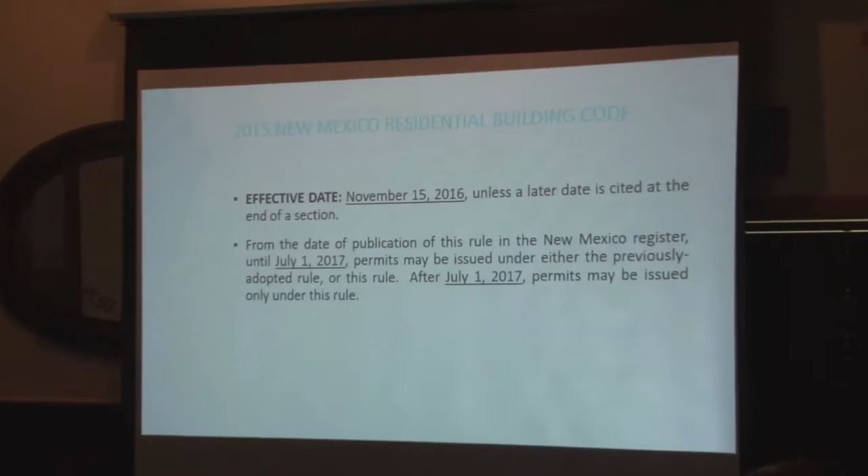So this is the effective date that we just talked about. So the actual adoption of the code took place on November 15, 2016. This is when the code was actually published. But what we did this go around in the body of the codes is we put some verbiage on the bottom which granted a 6-month grace period. So they put the effective date of July 1st, 2017. So once again, that date is in effect. So everybody's required to be in the 2015 building code.

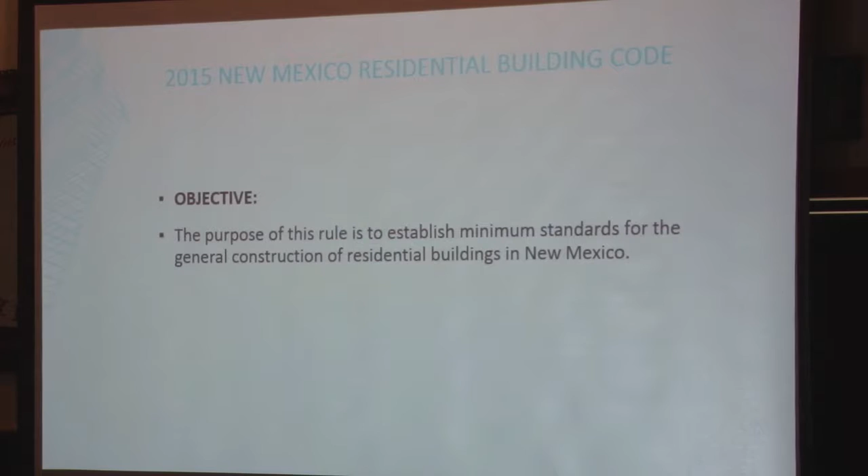So what's the objective here? The purpose of the rule is to establish minimum standards for the general construction of residential buildings in New Mexico. Adoption of the 2015 International Residential Code. This rule adopts by reference the 2015 International Residential Code as amended by this rule.

Oftentimes, contractors, even architects, they think, well, the state adopted the International Residential Code. What we do is we adopt the International Residential Code by reference with the New Mexico Administrative Code. So the New Mexico Administrative Code is always the first code, and then the code that you have adopted is the second code. So you always want to reference the New Mexico Administrative Code to see what those significant changes are, if any.

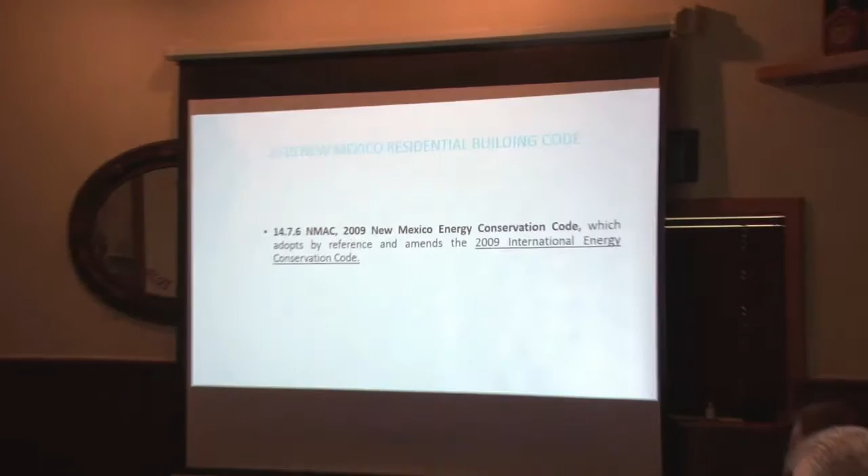One of the major things that we didn't change this go around is the Energy Conservation Code. We chose to stay in the 2009. At the end of the day, it's all about dollars and cents. What is that added cost to go from the 9 to the 15? And I could tell you some of those costs were significant. And again, it all comes down to dollars and cents. So we chose to stay with the 2009. So any references in the 15 that referenced the 2015 Energy Code, you got to refer back to the 2009 because that's the code that we're under.

We're going to get into Chapter 3, Building and Planning. So again, this is where some of the significant changes are, changes that we made. And once we're done with this presentation, I'd be more than happy to share it with Joyce so you don't have to take any notes, and she could email it to everybody. That way they can reference what those significant changes are.

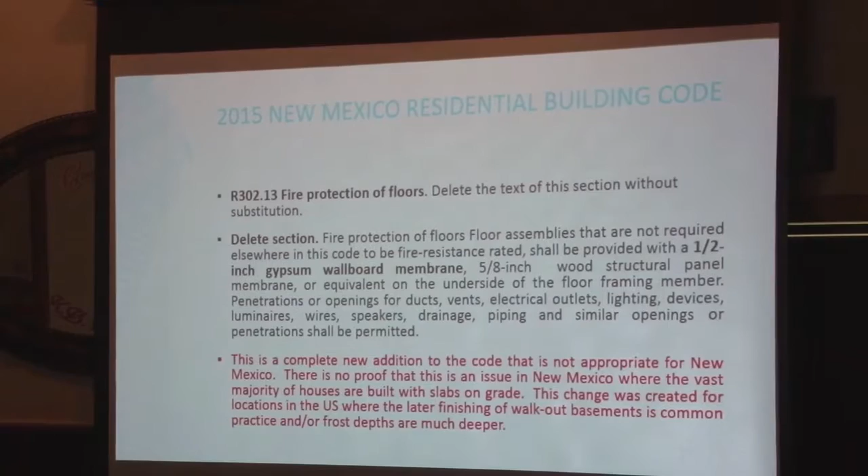One of the other changes that we made is under fire protection of floors. This is something that they placed in the body of the code where the underside of floors would have to be protected with 1/2-inch gypboard or 5/8. So what we did is we amended this out of the code and it's no longer required.

And the reason for that, this is a completely new addition to the code that is not appropriate for New Mexico. There's no proof that this is an issue in New Mexico where the vast majority of houses are built with slabs on grade. This change was created in locations in the U.S. where later finishing of walkout basements is a common practice, or frost depths are much deeper. So once again, we didn't think it was necessary, and that's a lot of added costs if you do have a subfloor. So we took it out of the code. It's been amended.

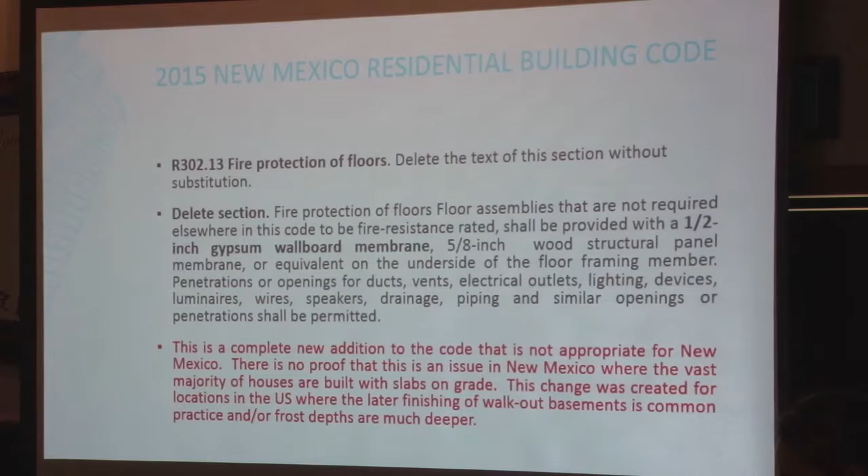This is dwelling and garage fire separation. The reason why I have this in here is this topic always comes in every code cycle, from the 3 to the 6 to the 9. It was even in the 12 to 15, where the separation between the house and the garage in the IRC, it could be half-inch gypboard. What we've done is we've amended that, and we require that it be 5/8 gypboard between the house and the garage. So that is in the NMAC. It is in there. All the information is in there verbatim, the way I have it right here.

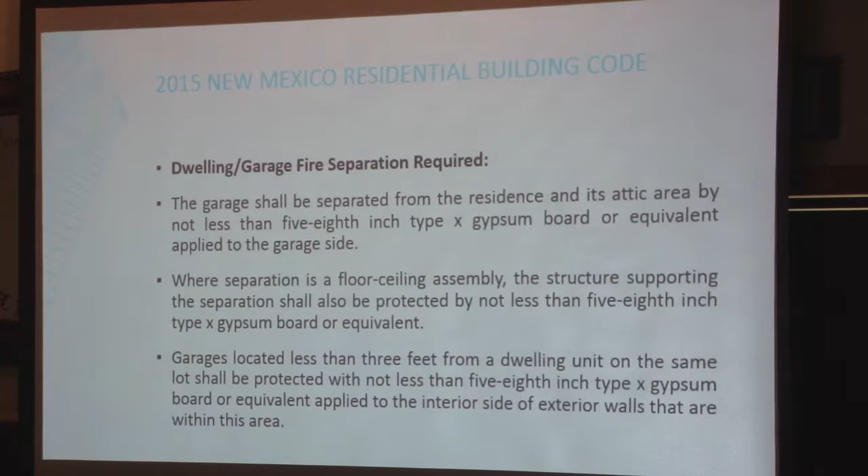Another question that comes up: are you still required to have the spring-loaded hinges between the house and the garage? The answer is yes. You could have the spring-loaded hinges, or you can have an actuated hinge that sits at the top of the door, so long as that door is self-closing.

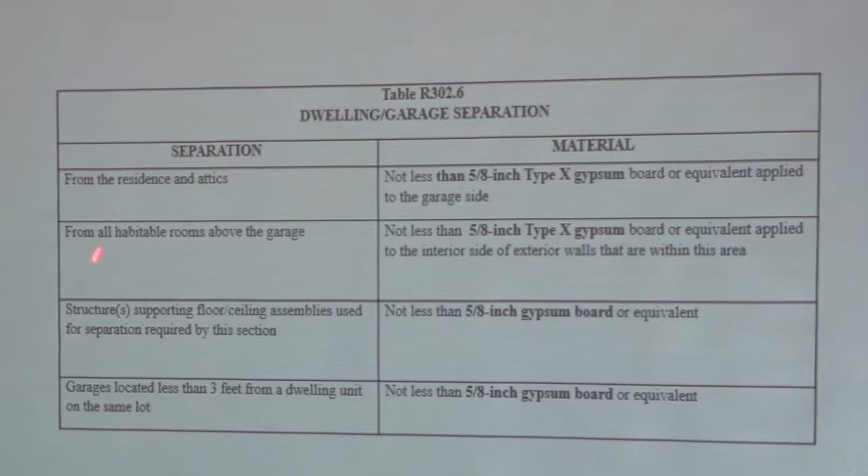If you go to the New Mexico Building Code, this is a table that's referenced in there on what the separation requirements are. If you notice, from the residence to the attic, from the habitable rooms above the garage, everything's called out all the way to the bottom, and it's all 5/8 gypboard. That's what would be required. So it is in the body of the code now. If you build a garage, this is what the garage has to look like when it's done.

So, all right. So, I'm just joking. Yeah.

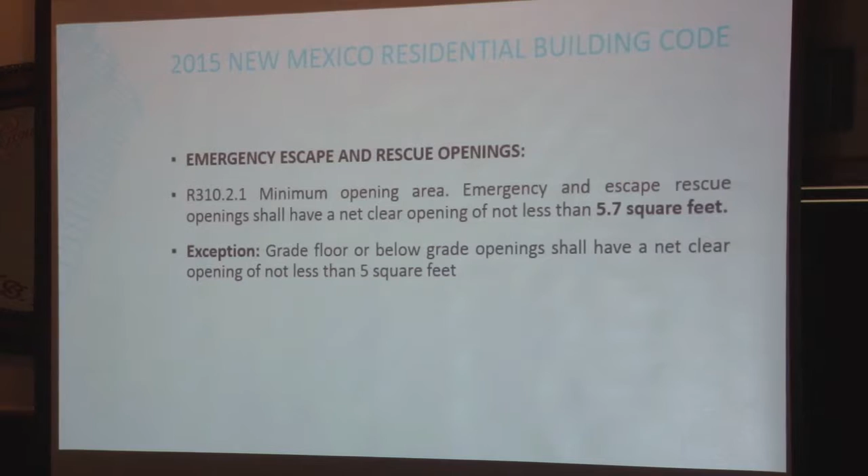So emergency escape and rescue openings. Again, this is just kind of a refresher. 310.2.1 minimum openable areas. Of course, everybody knows the requirement is 5.7. How many of you know that there's an exception in the code? There is an exception in the code where you could reduce that square footage down to 5.0. However, the sill height has to be on the outside a minimum of 44 inches. So there's an exception where you could reduce that egress. And again, that's only on a one-story structure.

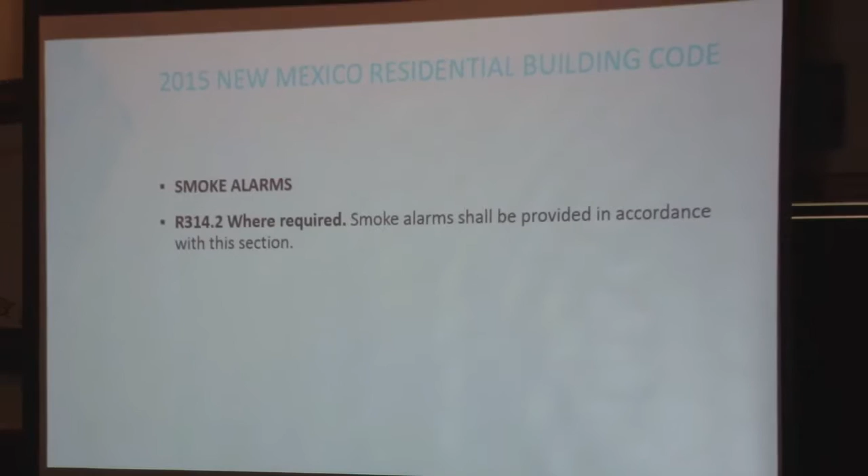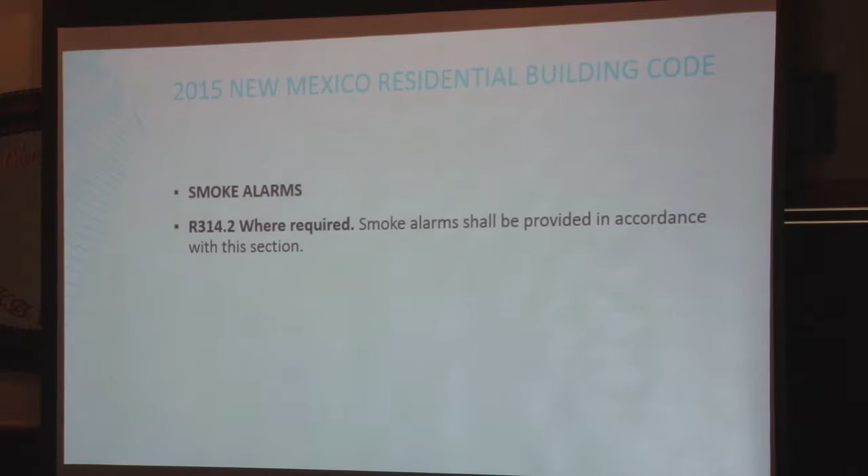Smoke alarms. This is another, again, just refresher. This hasn't gone away. Smoke alarms are required. But what we're going to talk about here is the placement of smoke alarms. Oftentimes I go to houses after the fact and I see smoke alarms that are tucked right on the corner of the ceiling and the wall. That's not acceptable. Smoke alarms don't operate that way. So let me show you some examples.

So you see, there's an example here, you have a smoke alarm. It has to be a minimum of 4 inches away from the corner of the ceiling and the wall. Once again, they say smoke doesn't get into corners. So that's the reason why you want to have it away from the wall and or the ceiling. And if you look at the manufacturer specifications on some of these smoke alarms, some of them require that you be a minimum of 6 inches. It just depends on what product you're using, but for sure you have to be at least a minimum of 4 inches away from there.

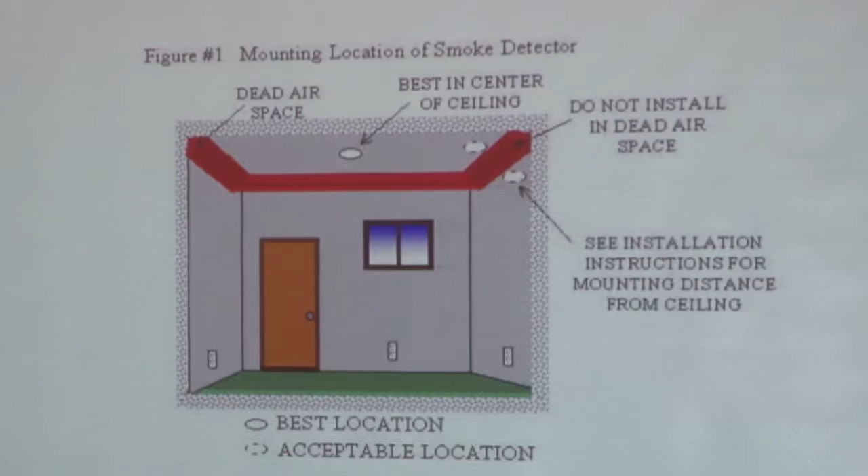Here's another example of the 4 inches. If you got a pitched roof, same thing would apply. From the peak of that roof, you want to be at least 4 inches down before you place any of those smoke alarms. On this type of roof as well also.

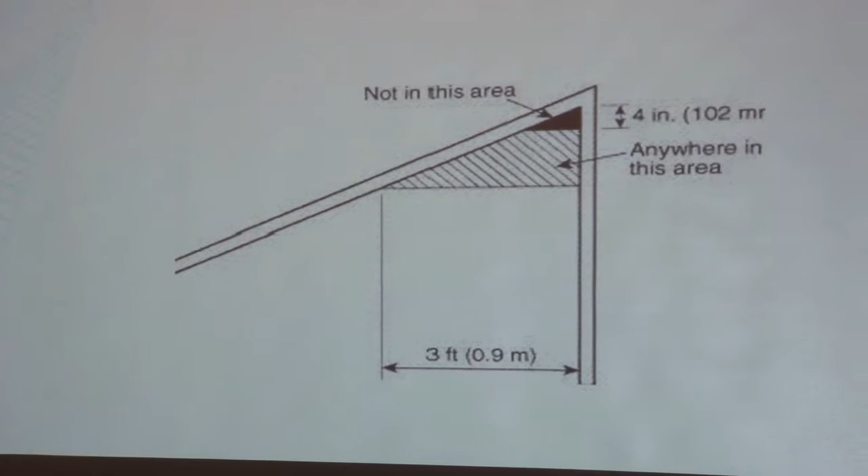So now we're going to get into carbon monoxide. Carbon monoxide detectors were introduced into the code in the 2009. They are required. Anytime you have a gas fired appliance, you have to put these carbon monoxide detectors. There are some carbon monoxide combination smoke detectors that are acceptable and you can use. So if you come across a situation where you have to do a combination, that is legal and you can do it.

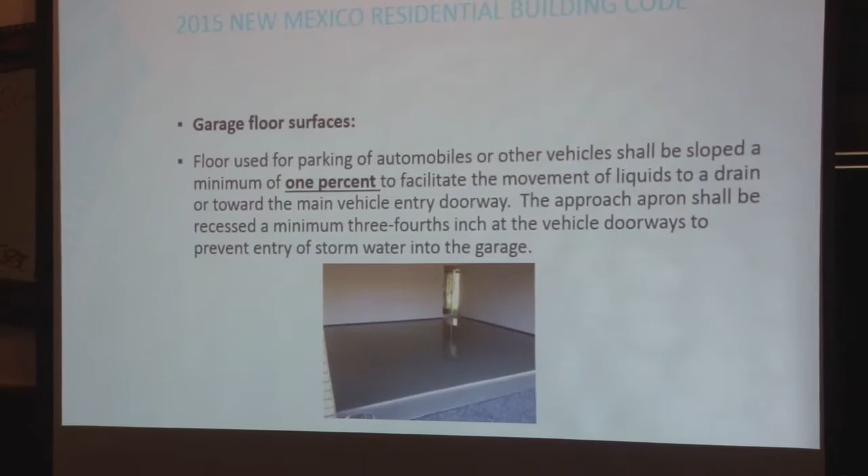On this section of the code right here, I like to call this the Ron Hibner, my chief inspector. I think it was a good change that we made in the body of the code. Before, it said a slope is required, but it didn't tell you what that slope requirement is. So what we did is we've amended that section of the code, and in the body of the code, we've indicated what that minimum requirement would be, and that is 1% slope on any garages that you have to have for water to get out of there.

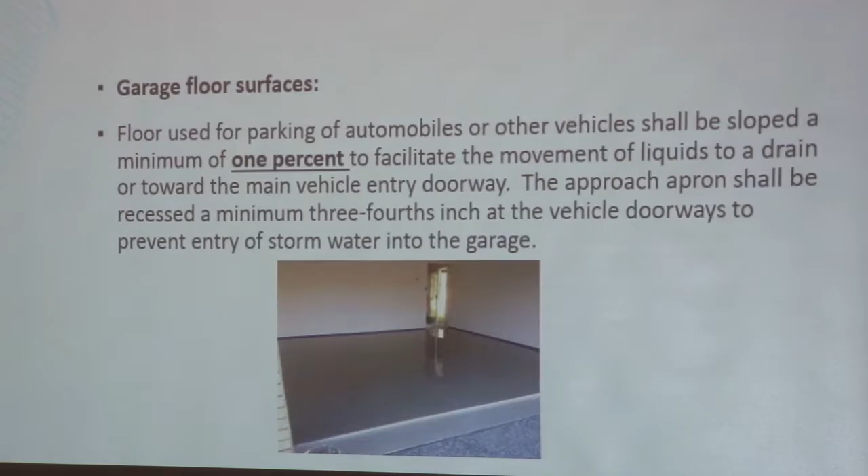This one is stair treads and risers. This is one of the ones that the State Home Builders Association was instrumental in putting back into the body of the code. This was removed under the 2006 code adoption, and they didn't like it. So what they did is they submitted some amendments, and we were able to bring it back into the body of the code of the 2015.

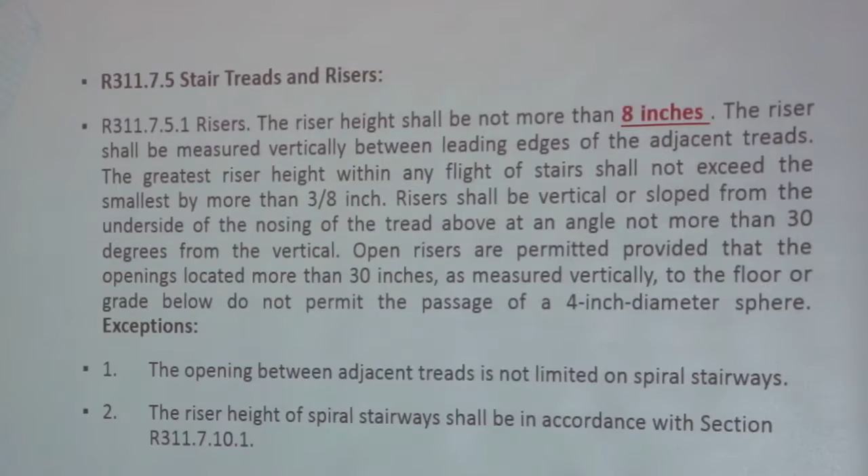So the changes are the riser height shall not be more than 8 inches. And the tread depth should not be less than 9 inches. On this red area over here, that's what's in the code now: risers 7 3/4 inches, treads 10 inches. So this is what's been amended right here.

The purpose of the amendment is to retain the stair geometry requirements to those that have historically been allowed under the Building Officials and Code Administrators National Building Code, BOCA. This amendment will allow continued use of the 8 and 9 geometry, which is also historically an accepted requirement of many other states and local jurisdictions across the country. Many others actually adopt stair geometry requirements of 8 and 9. So that's the justification and reason for amending that section of the code.

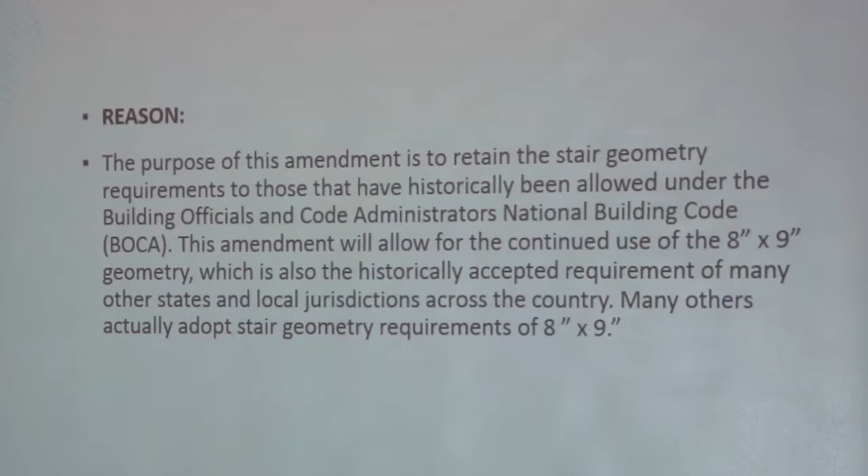Through the NMAC process, which is a lot of work to do, I made a mistake. And this is a mistake I made: under section 311.7.7.3, it should read 311.7.8.3. So when I have an opportunity, I will get back into there and fix that, but I did make a mistake on that. And the red area is the correct reference.

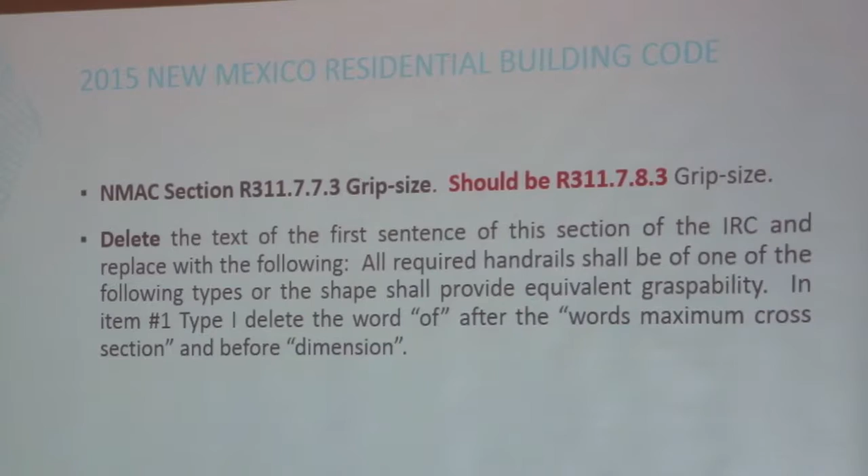There's another section that we changed under section 320, accessibility. Delete the text of this section and see section 310.5 of the IBC. And this is what it reads below. So again, this is mainly dealing with if somebody has maybe in a rural area a cottage or something that they rent overnight, some type of overnight stay. So this is what this section talks about.

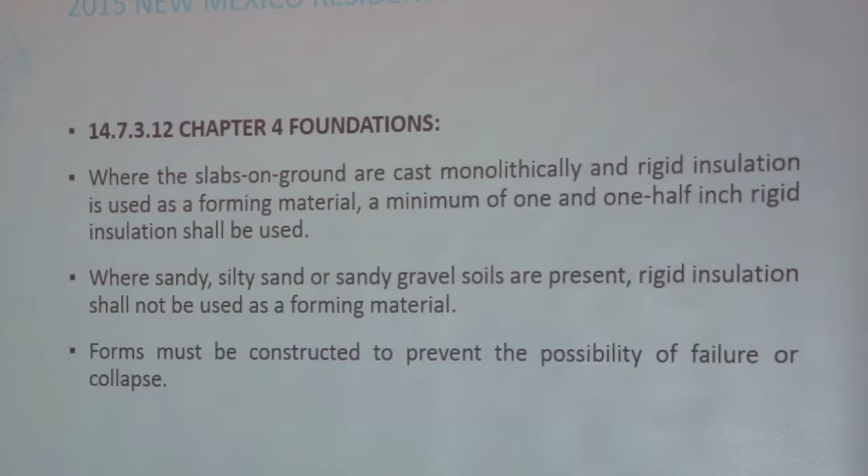Chapter 4, foundations. Where slabs on the ground are cast monolithically and rigid insulation is used as a forming material, a minimum of 1.5 inch rigid insulation shall be used. So if you have a monolithic slab, it doesn't matter what climate zone you're in, if you're going to use the insulation as a forming material, it has to be a minimum of 1.5 inches to be able to do that.

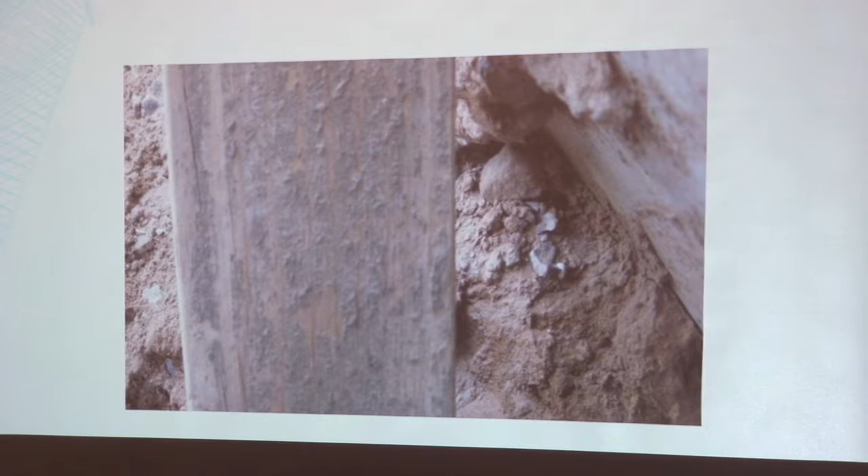And this is a lot of the reason why. If you look at this foundation system, this is a straight edge here, 2x4. There were issues on this particular structure. You see how far the insulation has concaved back in. So what occurs is instead of having a minimum of a 12-inch footing at the bottom, you have a 3 or a 4-inch footing because that insulation is pushed all the way in.

And what happens is when you're on the job site, there's some laborers behind you putting some dirt in there, and they might put too much dirt and push that insulation too far. And when that happens, you have a footing that doesn't meet code. Here's another situation: you have blowouts that happen in this area. Next thing you know, you got a chipping hammer. You're breaking that out to try to get a straight edge on there.

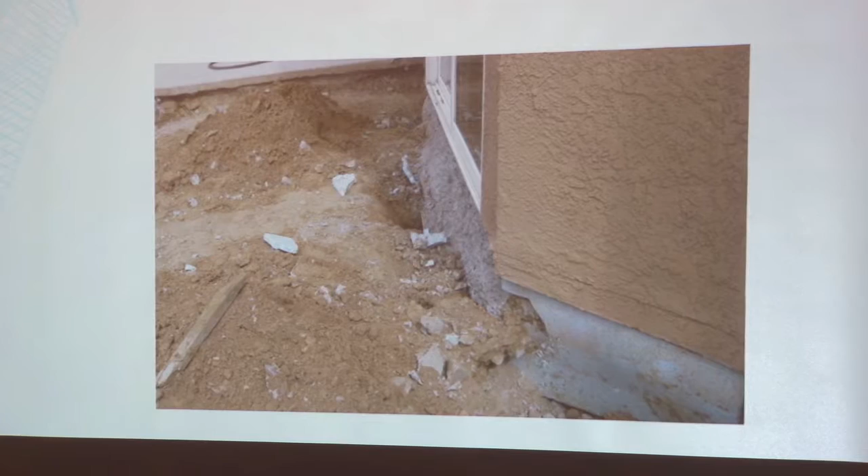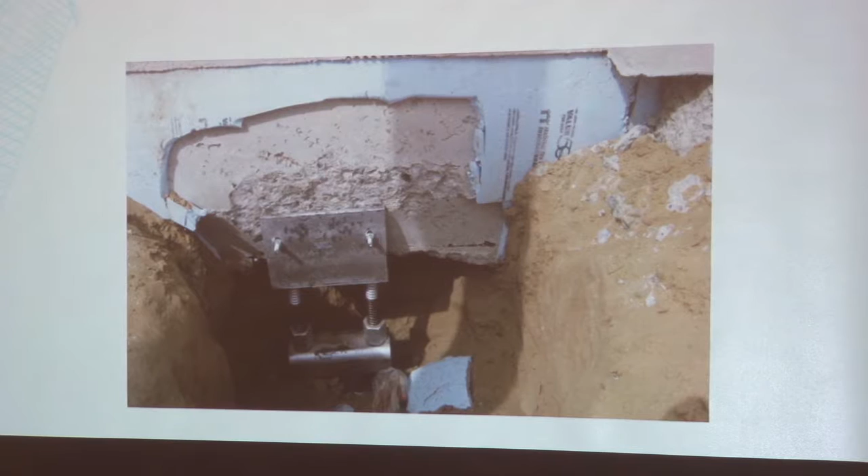Here's the other example with a straight edge from the top. You see how much that foundation has pushed in. Again, that's not acceptable. And this is kind of the aftermath when that happens. You don't have the proper footing down there supporting that structure. That house starts settling or collapsing, so you got to get some of these jacks to jack that house back up. And if you have to do this, that's going to be extremely expensive. On a single family dwelling, you could be looking at anywhere from $10,000 to $15,000. It just depends. It's really expensive.

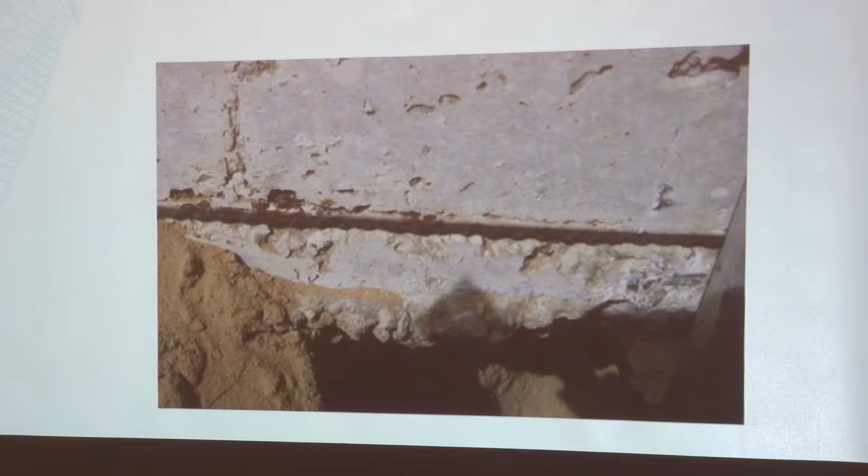Here's another thing that's not acceptable on foundations. Some things that we see out there is you see the rebar at the edge of the foundation. Where does the rebar belong? It belongs inside the footing. It can't be on the edge. Here's kind of the aftermath of that footing, the measurement of how much actual footing is underneath that structure. If you look at the tape measure there, we have approximately 3.5 inches of footing, and the minimum code is 12 inches, and that's definitely not acceptable at all.

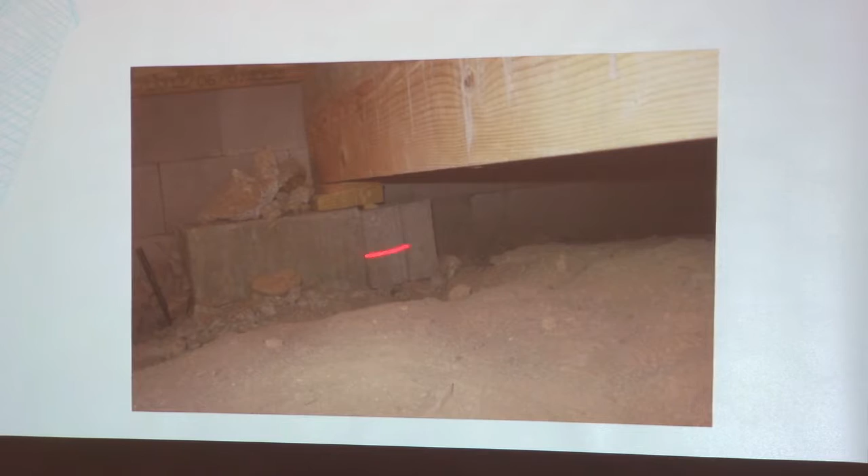Foundations: we have a foundation system where on this particular job they have a girder. They missed the spot footing on the inside of that crawl space, so they said, well, we'll just get a cinder block and block it with some wood and call it good. Again, these are some things that we see out there when we receive complaints. That's not acceptable. If that footing was supposed to be in place, they need to correct it and pour it where it has to be. You just can't do that type of work.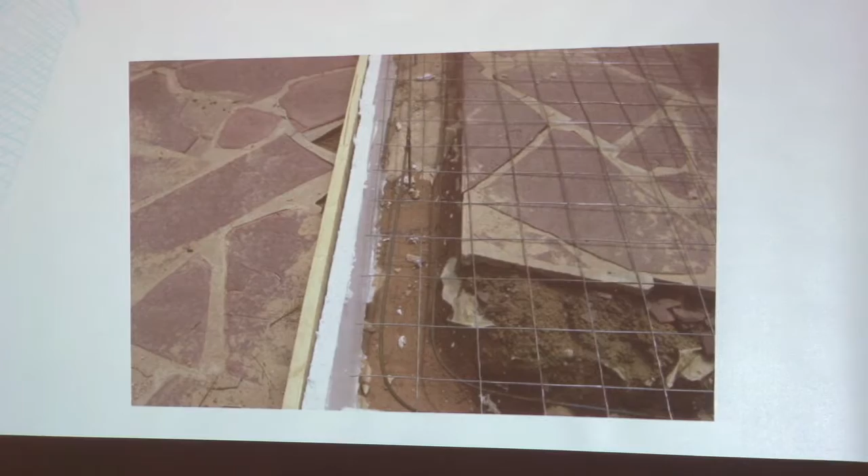Here's Chapter 6. There are a lot of changes that occurred under Chapter 6 where if you look at the NMAC code, a lot of stuff isn't in there. The reason it's not in there is because it's already in the body of the code verbatim, so we just deleted it and stayed with what's in the code. But one of the things that we did keep is you are required to have the 1/8 gap on the OSB, which allows for expansion and contraction if you have a stucco system, just to cut down and prevent some of that cracking from happening. So again, that still is a requirement.

If you look at the stamp that's on the plywood, it has it noted as a recommendation. It doesn't matter if it's a recommendation, because we made it a requirement in the body of the code, so you have to do it. So if you have an inspector that goes out there and says you require that 1/8 gap, it is in the code, so he will cite you for that as a code violation.

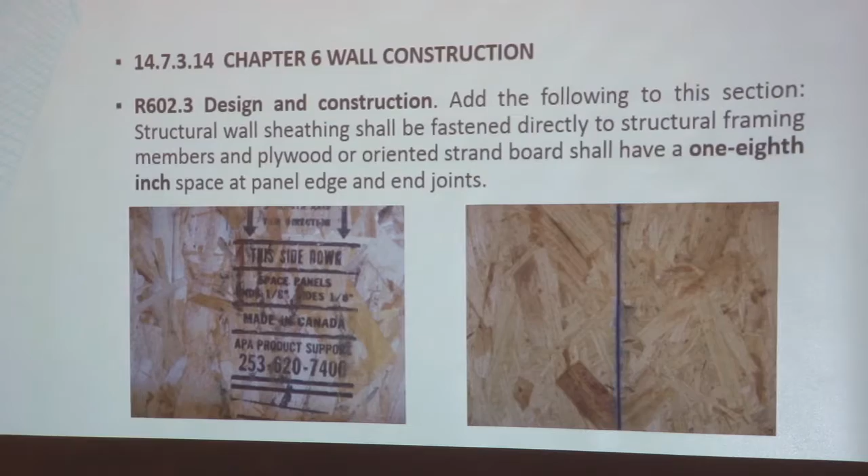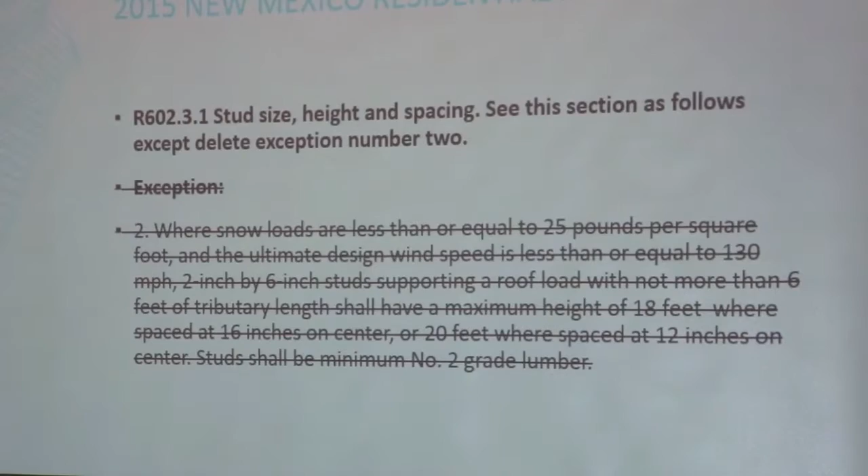Here's another thing that we removed under Chapter 6: stud size, height, spacing. See this section as follows, except delete exception number 2. So we deleted this out of the code. Design and construction of log members. I don't know if in the Farmington area you guys deal with a lot of heavy timber, vigas, heavy beams? Well, there is an exception in the code that says if you're using any rough sawn lumber, timbers, vigas, etc., and it doesn't have a grade stamp, a grading report issued by an engineer or architect will be accepted. So if you have some timber that hasn't been graded, you could contact an architect or an engineer to review that.

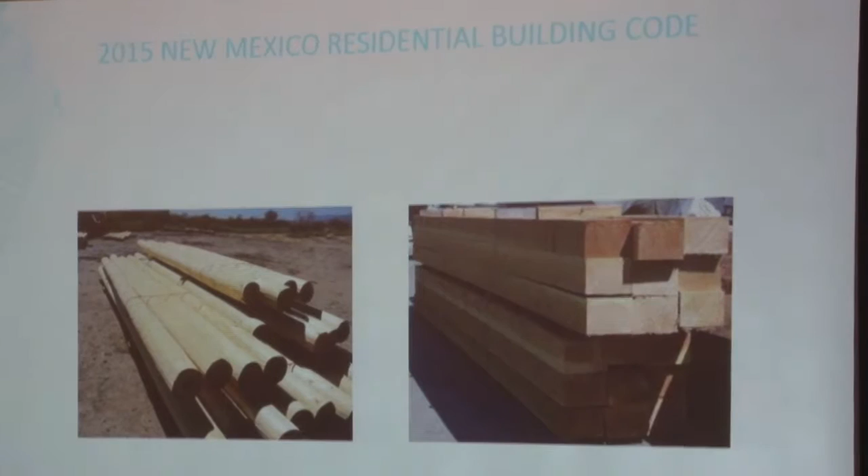So this is what we're talking about here, vigas and some of the heavy timber. Say for example on this back wall there's a heavy timber beam, maybe it's a 6 by 12, but it's non-structural, and above that maybe you have a glulam or microlam with the roof structure resting on top of that, and that beam's more cosmetic. I would see that as no issue, and it doesn't matter if you have a grade stamp on there or not, because it's non-structural. Even with vigas, sometimes you have a truss system above and the vigas below. In my eyes, that's non-structural. So keep that in mind, and if you come across that situation with an inspector, I would just note that to them.

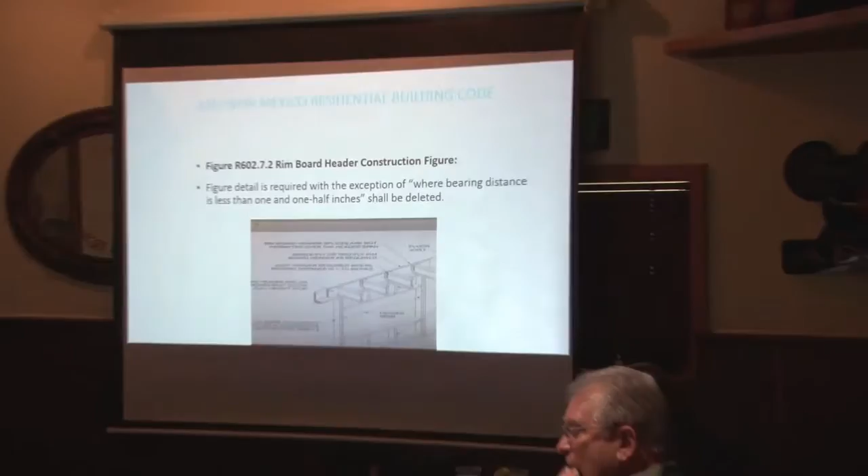Here's a change that we made on this figure under 602.7.2, rim board header construction figure. If you look, where is it at? Right here. We changed this part. We deleted where it says joist hanger requirement where bearing distance is 1.5 inch. We deleted that out of that figure, so that's where we amended it under this section.

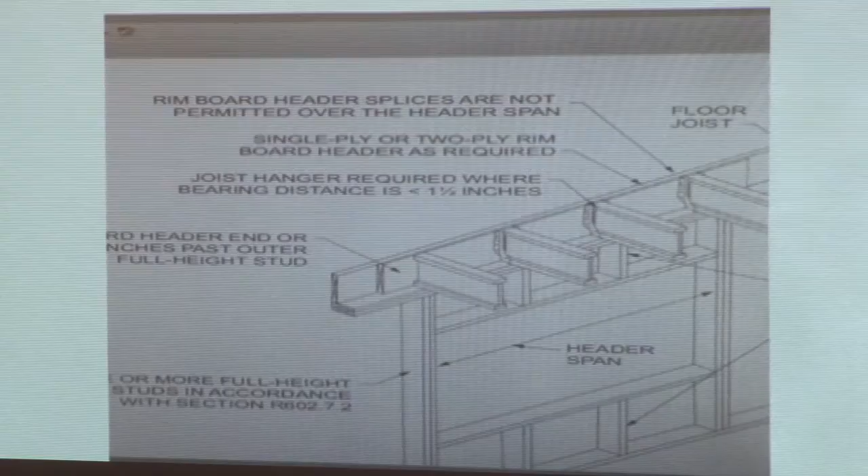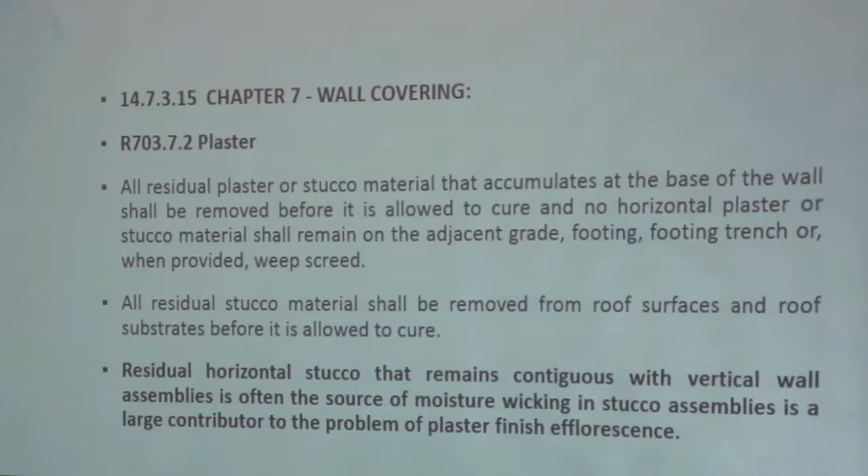Chapter 7, I'm going to get into wall coverings, plaster. This is a big change: residual plaster or stucco material that accumulates at the base of the wall shall be removed before it is allowed to cure, and no horizontal plaster stucco material shall remain on the adjacent grade, footing trench, or when provided with a weep screed. Reason is residual stucco that remains contiguous with vertical wall assemblies is often a source of moisture wicking, and stucco assemblies is a large contributor to the problem of plaster finish or efflorescence.

So if you have a stucco system and once they're done plastering, what they want you to do is get a square shovel edge and remove that stucco away from the bottom of the footing. It doesn't say take it out, but at least get it away from there before you place your backfill, because that residual stucco that stays at the bottom acts as a wick, and it wicks that water back up the wall assembly. So that's the reason why they want you to move it away from that wall assembly.

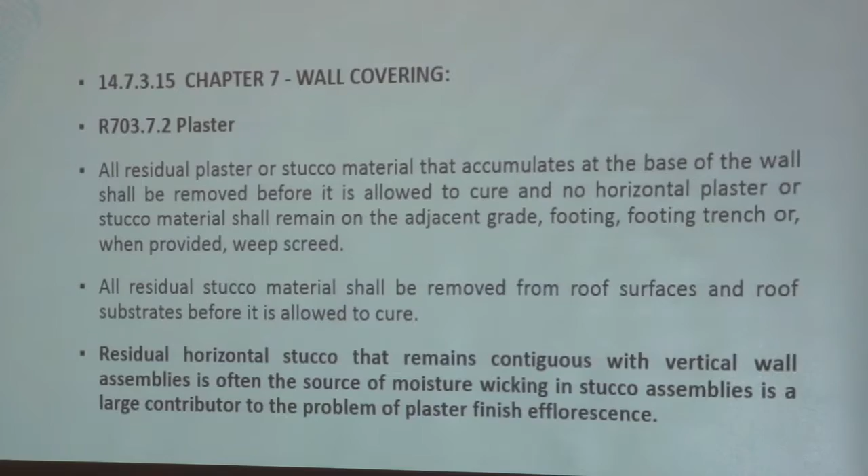Here's kind of an example, at the bottom of the footing. If you have any residual stucco down there, it's got to be removed away so that it doesn't wick back up that wall assembly there.

Same thing applies to roofs. If you have a roof system and you got residual stucco that falls on the inside of that parapet, you got to get that out of there. It's got to be clean. When they do the color coat or the brown coat or whatever they're doing, it's probably a pretty good idea to cover it. That way you don't come across this type of situation where there's a lot of cleanup that has to get done.

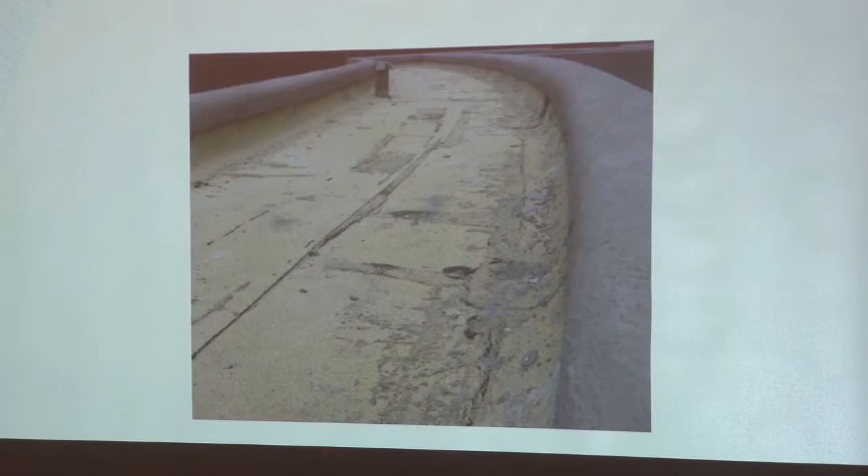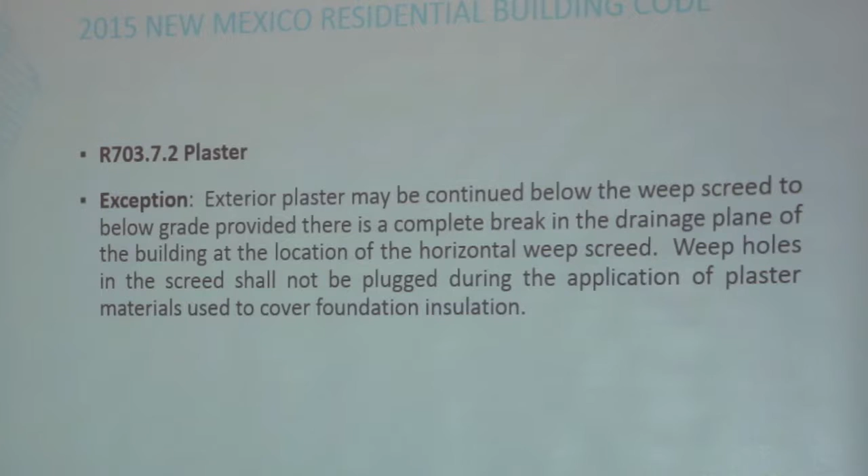Plaster: exterior plaster may be continued below the weep screed to below the grade, provided there is a complete break in the drainage plane of the building at the location of the horizontal weep screed. Weep screed holes in the screed shall not be plugged during the application of the plaster materials used to cover the foundation insulation. So again, weep screed hasn't gone away. It's still in the code. Anytime you use an acrylic or synthetic, it's required. If you use a cementitious, then it would be different. So the requirements for weep screed are a minimum of 4 inches above earth or 2 inches above paved areas.

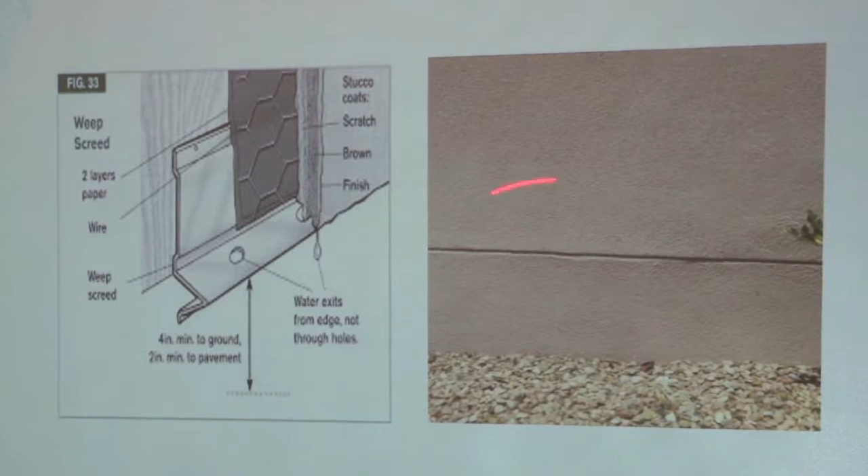So here's an example of the actual application of the weep screed when it's all said and done. This is what we're looking for here on the right hand side. And again, you have a nice weep screed there. The holes haven't been compromised. Everything below the weep screed is sacrificial. So what we're concerned about is from here above the weep screed.

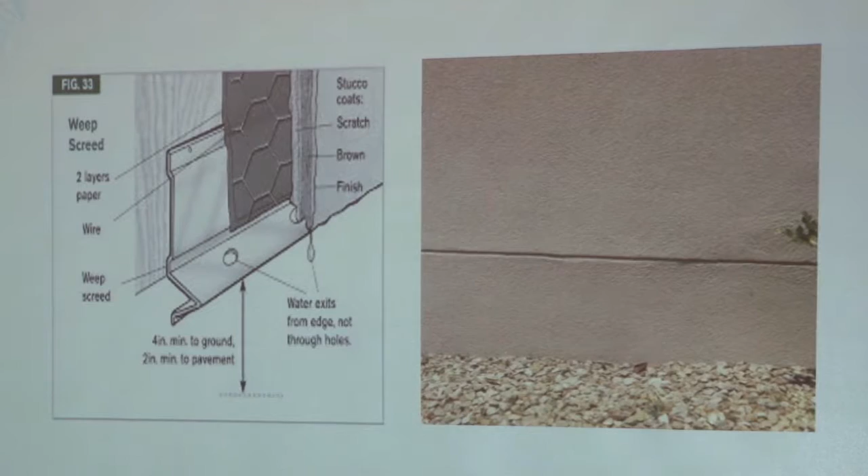This area I have as an example because oftentimes, if you look at the previous 2 slides where it talks about where you're required to have a minimum of 4 inches below the weep screed, what happens is that you have the landscapers that come in after the fact and they bring some topsoil, potting soil, and they start filling in around the house. Next thing you know they've brought up that earth too high and they've covered up that weep screed. That's not acceptable. So as a contractor, you want to factor that in when you do your final grade. If there's going to be any topsoils brought back in, how much? That way you maintain that 4 inches that's required by code.

This is a big change: water-resistive barrier. Delete this section as follows and replace with the following. So this section of the code, 703.7.3, it's the same section that is in the 2009. What we did is we deleted what was in the 2015, and the reason for that is the individual layer shall be installed independently, such that each layer provides a separate continuous plane, and any flashing installed in accordance with section 703.4 intended to drain to the water-resistive barrier is directed between the layers.

So what they were wanting you to do is, when you get the jumbo tex, it already comes with the 2 layers of paper on it. You put it on there, staple it. What they were wanting you to do is get this paper and do it individually. So that's double the labor costs. And that doesn't make sense, because what we've been doing all this time has worked fine. There's no issues. The stucco industry was involved in this, and they said we have no issues with the way it's always been done, so there's no reason to add that extra cost to the contractor. So we're going to stick with what's in the 2009. I agree. There's no reason to add that extra labor cost, and so we deleted that section out completely.

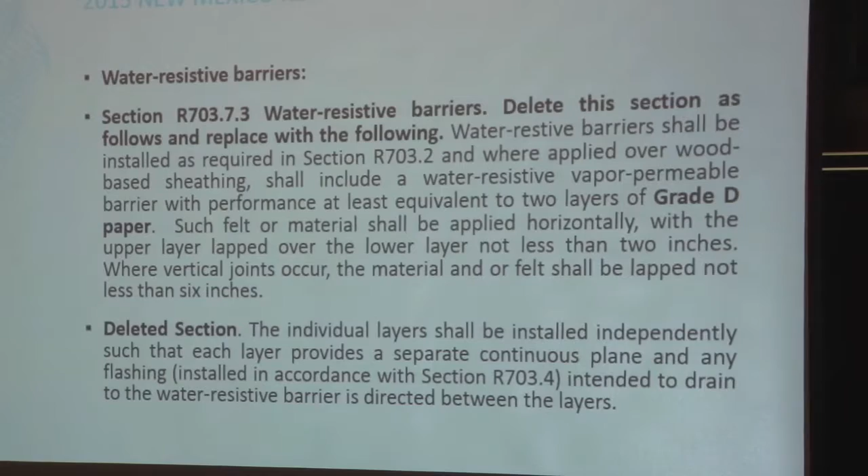So this is kind of an example of how traditionally it's always been done. You got the 2 layers of paper. You don't have to do them individually, so nothing's changed. Just refer to the NMAC; what's in the 2015 has been amended. So just go to the New Mexico Administrative Code.

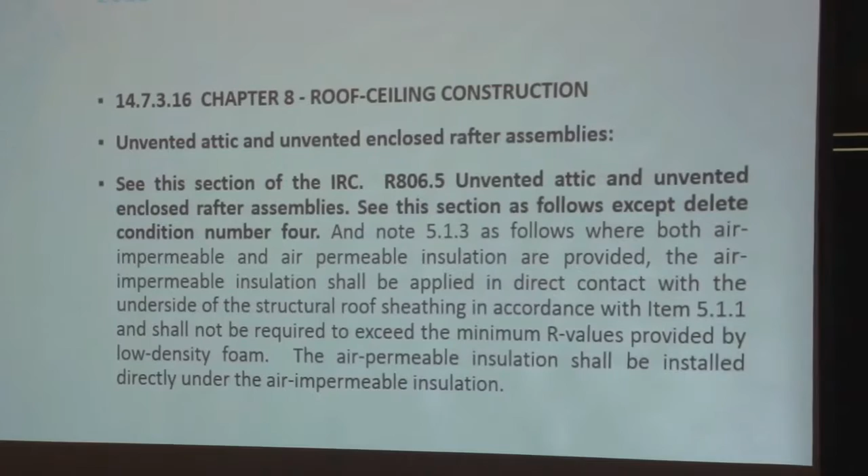Unvented attic and unvented enclosed rafter assemblies is a change we made. Unvented attics and unvented enclosed rafters: see this section as follows, except delete condition number 4. So that's the change that we made right there. Here's an example, 806, unvented enclosed rafter assemblies.

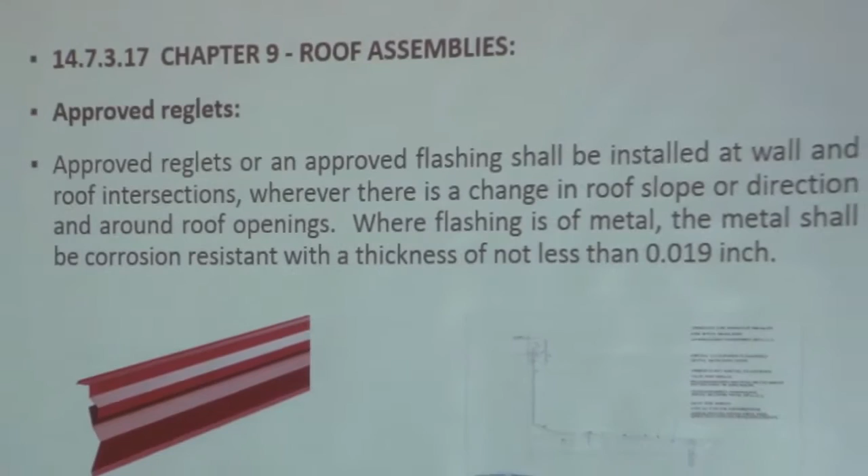Now we're going to get into Chapter 9, reglets. This is oftentimes a big issue, especially in new construction. You have to have some type of reglet on there or some type of approved flashing, because anytime you've got to come back on the structure and do any type of re-roof, it allows that contractor somewhere to terminate his roofing at. So this is a big deal.

It is a requirement. So on any new construction, reglets are required. It is a code requirement. And these are a couple of examples. The one on the right doesn't show up too good, I apologize, but this is an example of what we're talking about when we're talking about a reglet that's required.

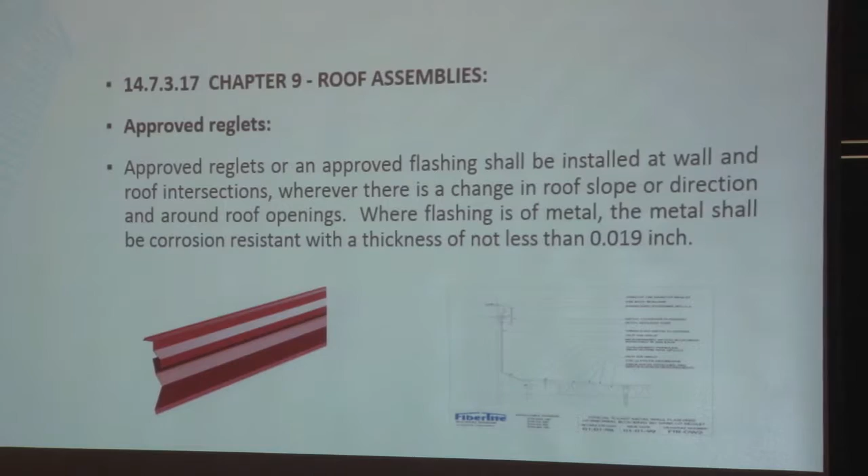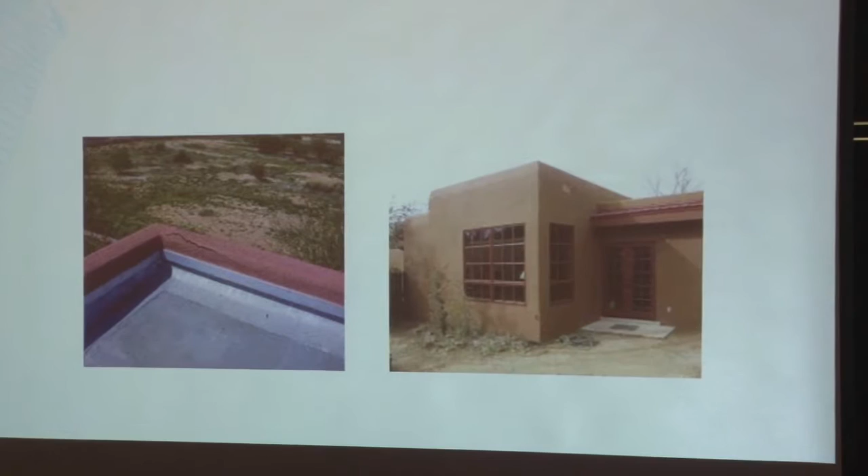Plastered parapets shall require a seamless but permeable waterproof cover or weather barrier capping the entire parapet. So if you have a parapet assembly, it's got to have some type of waterproofing cover on top of that parapet, and the reason why is after the fact these types of cracks occur, and we want to try to keep that structure dry. That's the reason for having that waterproof cover. It also talks about some of the nailing, and a layer of furred lath. Let me see.

So if you have a parapet, we want the weatherproof cover on top, and we want to have minimal nails on top. Any nails that you have to put have to be on the side. And if you have a parapet that's angled, like the Southwest Pueblo type of look, you want to maintain minimal nails on that angled side as well. That way we prevent any type of leaking.

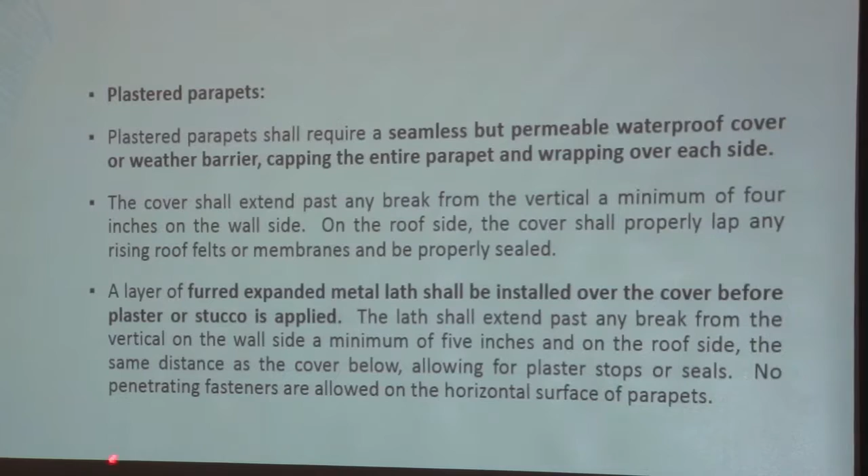Another change in this section is a layer of furred expanded metal lath shall be installed over the cover before plaster or stucco is applied. This is one that I don't think is being enforced and should be enforced. On the top of parapets, you should have an expanded metal lath. If you look at the flat lath, with these little dimples on there, it's an expanded metal lath that is a code requirement.

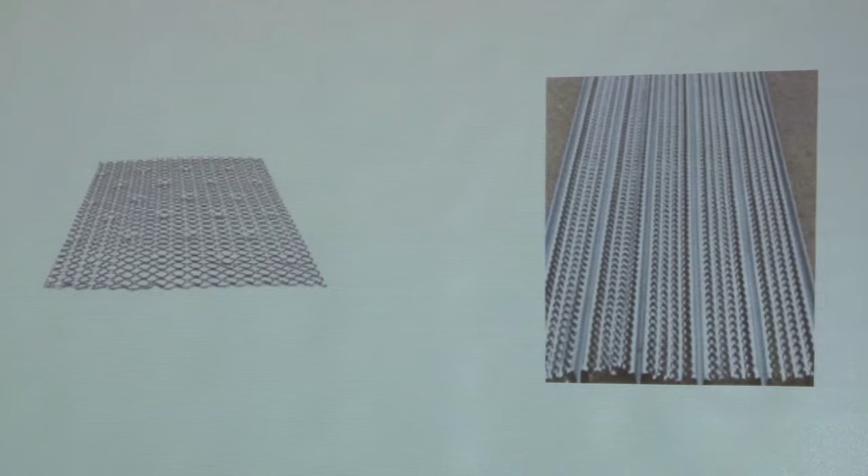Or you have this metal lath here that has the grooves in there. It is required, and the only place it would be required is on the top of those parapets, because you want to make sure that we get enough material in there to prevent any of that cracking from happening.

This is another big one in roofing. Roofing is a statewide issue from Farmington all the way down to Las Cruces, Hobbs. I guarantee you there's not a place in the state that we haven't received a complaint on roofing. And especially in northern New Mexico, this is one of the things that a lot of roofers are still trying to use. They're trying to use pumice underneath the roof.

As far as I'm concerned, pumice has never been allowed. I don't care what code you've been under, but it's traditionally been allowed, and they have used it. You cannot use it because, for any type of roof that you put on, the manufacturer specifications state that it's got to be mechanically fastened. If you have pumice underneath that roof, how's it mechanically fastened? It's not. So pumice isn't allowed.

Spray foam, I tried to make a few changes back at the end of 2015, 2016. I wasn't successful, but with spray foam, as far as I'm concerned, it all comes down to application. The material is only as good as the applicator. If the applicator doesn't know what he's doing, it doesn't matter what you put on there. And everybody knows spray foam is expensive. So if you're going to spend that kind of money, you want to make sure that it's done correctly the first time.

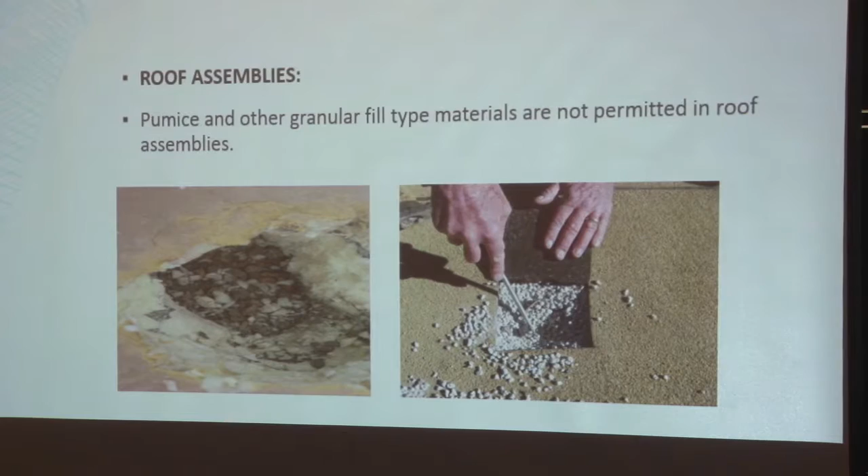It's another refresher. So if you have where the roof sheathing is overlapping a cricket, drainage crickets, or valleys to canales, taperboard or equivalent shall be used to transition between the two deck levels to create a uniform substrate. So again, it doesn't matter how the crickets are created. If you want to use a taperboard, it's fine. If you want to use plywood, that's fine.

But they are required, because oftentimes what happens is when you don't have these transitions, after the fact, you have the cable guy or the plumbing guy. They come in and got to service the HVAC, or got to put a new satellite, and they step on that roof, and there's no transition on there. Next thing you know, you got a hole on the roof. So you got to make sure that all these transitions have some type of taperboard on there.

Canales, this is another change that was made in the 2006, I don't remember, but for sure the 2009, where you have to have the 6-inch minimum to each side of the canale or scupper. And the reason for that is that, oftentimes in the winter, of course, water freezes. You got these icicles that form on the edge of the canal. Next thing you know, it's pulling down that whole canal, tears the inside of that material right there.

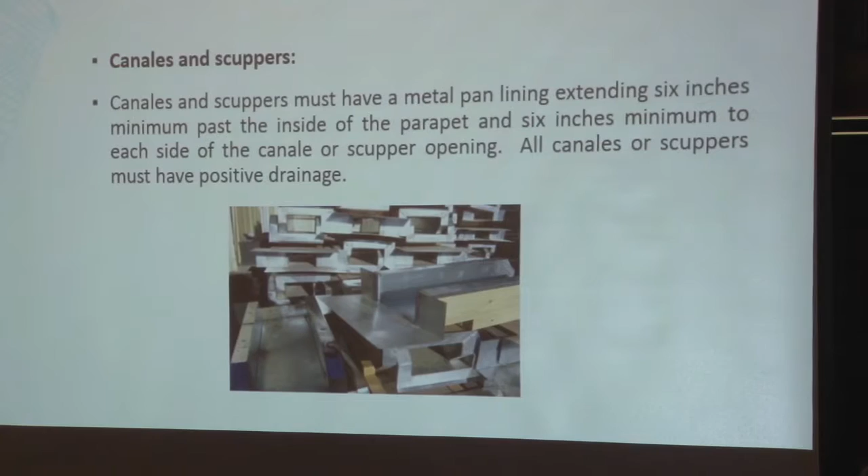So new roof coverings, where an existing roof or roof covering is water soaked or has deteriorated to the point that the existing roof or roof covering is not adequate as a base sheet for additional roofing. So these are some things that are in the code where an existing roof has 2 or more applications of any type of roof covering. So any time any of this applies, you got to remove that. If you have more than 2 roofs, you got to remove that roof all the way down to deck. There's no exceptions in that whatsoever.

I had a situation that happened about a month and a half ago. This is a true story. This roofing contractor came to Santa Fe from Albuquerque, and this particular house had 3 roofs on it. Also had a pumice roof on it. And this roofing contractor said, well, you know what? Let's just take a shortcut. Nobody will ever know. He said, let's take off the first roof of the pumice and then the second roof, and we'll leave the first one on the bottom. So, of course, he didn't take that roof all the way down to the deck as was required.

Well, this owner was paying attention, and she filed a complaint. So we went out there, had him do a core test, and sure enough, he had a built-up roof on there that he didn't remove. And that's a code violation. So he had to remove that whole entire roof completely and put a new roof on there. So anytime you have more than 2 roofs on there, it's got to come all the way down to deck.

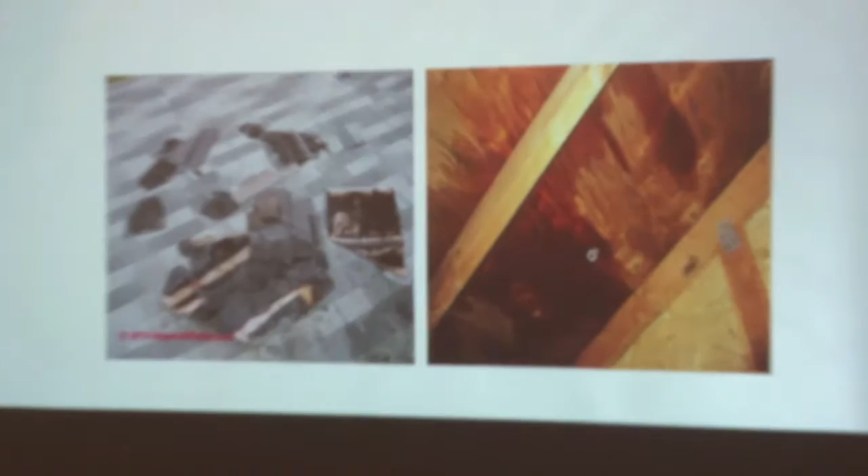So delete this section, section 14.7.3.24, chapter 42, swimming pools. Delete this chapter of the IRC and replace with the following. So what we did on this section under swimming pools is what was in the 2009 under swimming pools, we moved it to the New Mexico Administrative Code. We didn't adopt what was in the 2015 because that required having to reference another manual. And we said, nah, that's not going to work.

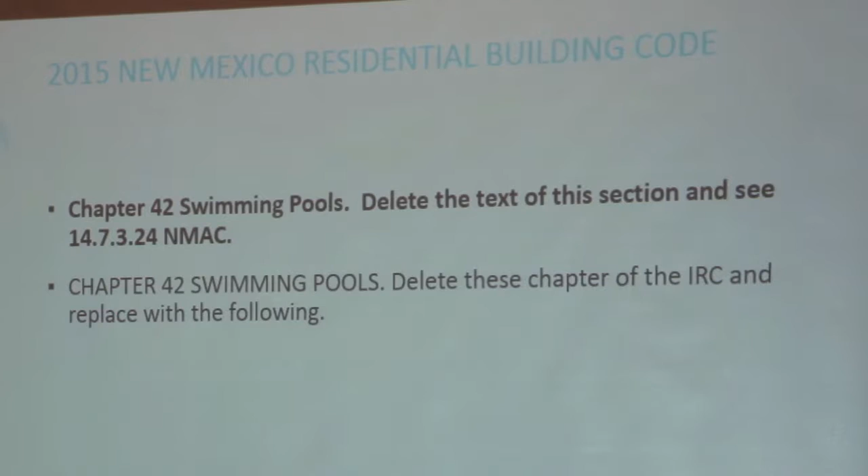So what we did is we took what was in the 2009, put it in the 2015 under the New Mexico Administrative Code. So if you have any issues dealing with pools, the NMAC is the section of the code that you want to reference.

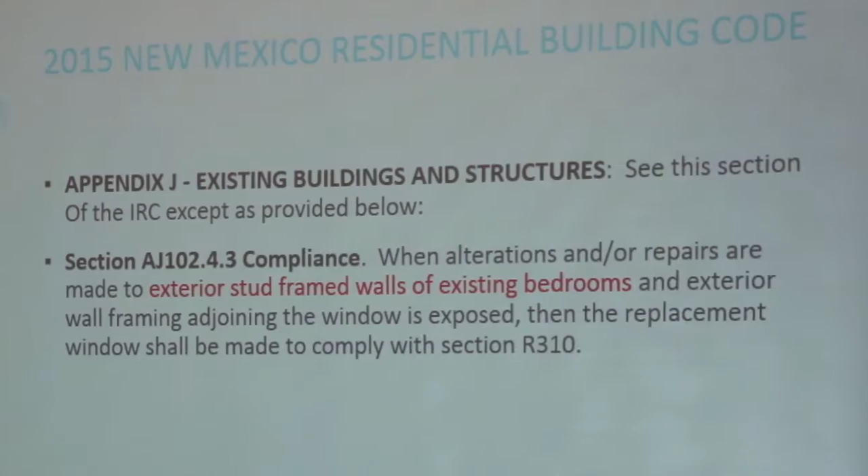Existing buildings and structures compliance: when an alteration or repair is made to exterior stud frame walls of existing bedrooms. I get this call quite a bit, and this is something that is adopted by appendix. If you have an existing structure and they want to replace the egress windows, but they don't touch any of the stud framing, all they're wanting to do is replace like for like, that window does not have to be brought up to code unless they compromise that opening somehow. Then you bring it up to code and it's got to meet the 5.7 square feet.

So how many of you guys know that we adopt Appendix J dealing with existing buildings for residential construction? No. So you want to reference it. It's towards the back of the code book. It's something that we do adopt, and depending on what type of structure you're dealing with, and it is an existing structure, there are some exceptions in there to meeting code requirements. So I would advise you to take a look at that. It could help you out in certain situations.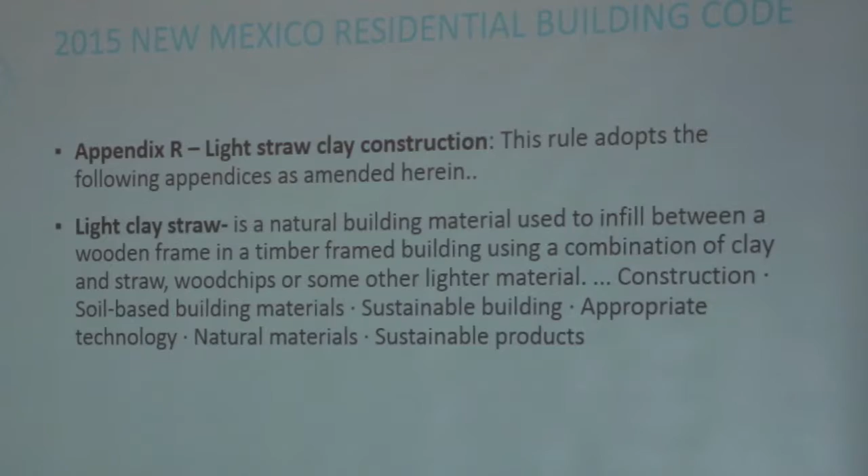One of the things that we did this code cycle is we adopted Appendix R dealing with light straw clay construction. You see a lot of this in northern New Mexico, like the Taos area. You see a lot of it in Tesuque, some of it in Santa Fe. It was usually done as an alternative, but ICC came up with an appendix this go-round, and we adopted that appendix. This is what we're talking about when we're dealing with clay straw. It's pretty much infill between the studs, clay straw construction. It is in the body of the code, and it is something that is allowed now.

Another thing we adopted in the body of the code is Appendix S, straw bale construction. As you all know, before we had a straw bale standard. We've deleted that straw bale standard and adopted the appendix of the building code. But the only thing that we did is when the final construction is done, a report must be provided by an architect or structural engineer, ensuring that the structure is structurally sound and they've met all the requirements of the code. So that's something that we kept from the straw bale standard. Anytime you deal with straw bale, they will be required to provide a report at the end.

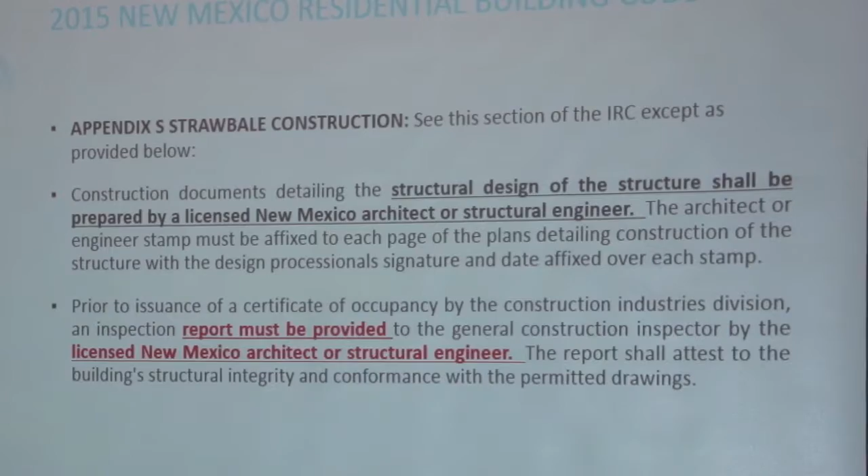So we're talking about straw bale. Of course, the outside would be plastered with a cementitious plaster. Something I like to advise: maybe somebody has a straw bale structure and they sell it, and the new owner doesn't like the color and decides, well, we're going to go to a synthetic brown stucco. That's not acceptable, because when you're dealing with straw bale, that structure has to breathe. You want to make sure that you maintain a cementitious plaster on there.

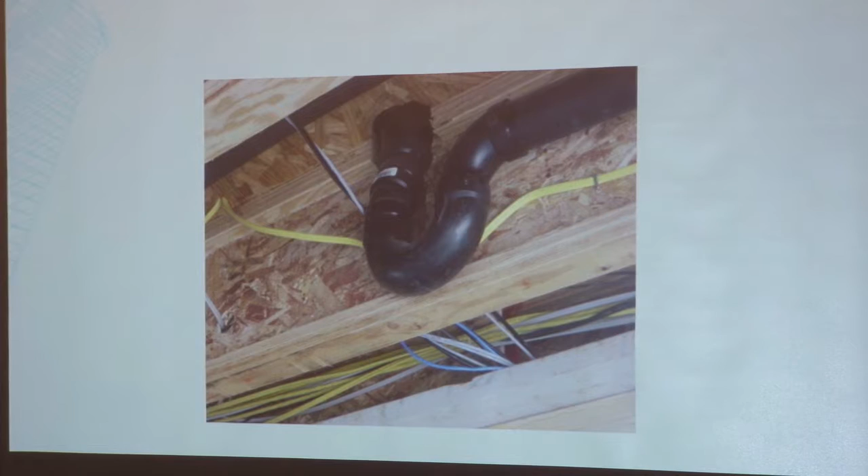Right now we're going to get into some of our do's and don'ts. Again, this is stuff that we see out there. So do we have any plumbers, electricians here? Okay. Not you, but I think some plumbers and electricians need an intervention on proper notching. Not this guy though. That's the type of stuff that we see out there. And you all know, anytime you compromise a TGI, you've got to contact the manufacturer, Weyerhaeuser. The inspector's not going to come up with any type of fix. You're going to have to come up with a fix, and it's going to have to be an engineered fix.

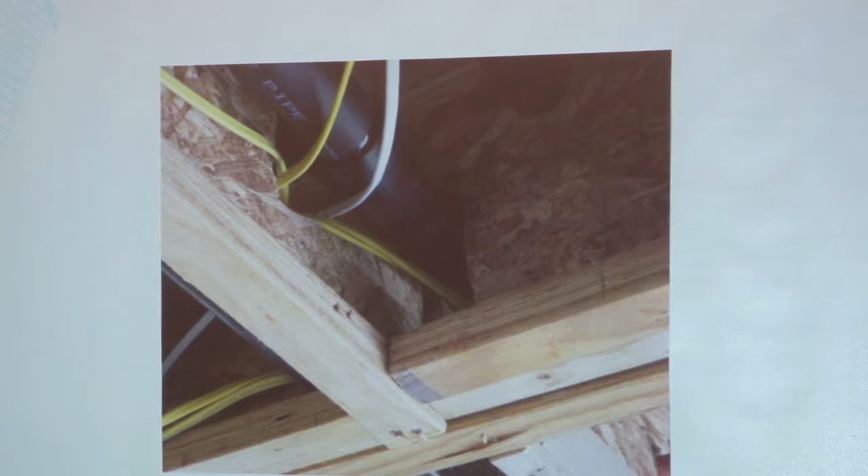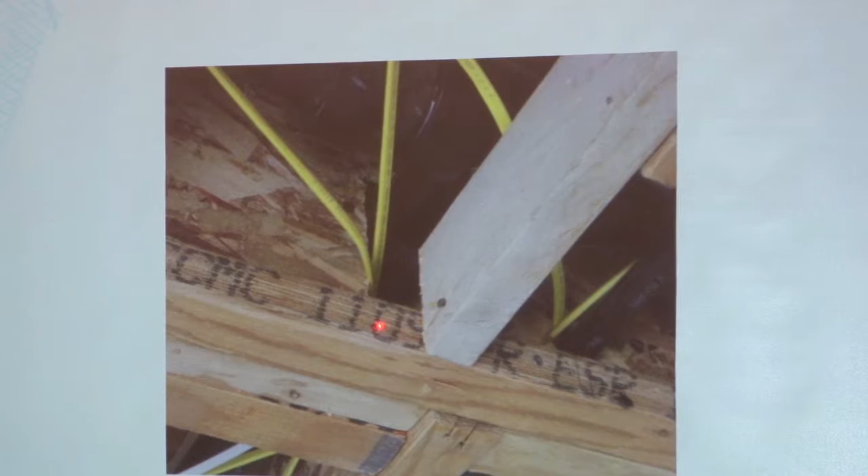Here's another example: no hangers. TGIs have been compromised. You'll see on the next slide, they had to run all the plumbing through there, so they said, well, we'll just scab a 2x4 on the side of the TGI, butt it into this other, and put one nail on it. That's what it looks like from the side. Cut all the plumbing out, we'll just run the 2x4 here on the side. That's not acceptable. You can't do that at all.

Here's another project. We'll just cut out the TGI completely. And again, this stuff's got to be planned. You can't just be butchering those TGIs out of there. You can't do that at all.

On this area right here, they said, well, we'll just take out the TGI completely and not bother to block it or put anything back in there. And on this particular job, there's actually tile above, and they're complaining about the tile cracking. And I'm like, well, I wonder why. You guys see the code violation there?

On this particular house, they were complaining about sewer gas on the inside of the house. They filed the complaint. We went out there and they forgot to remove the caps on top of the vents. So you just got to watch out for that type of stuff.

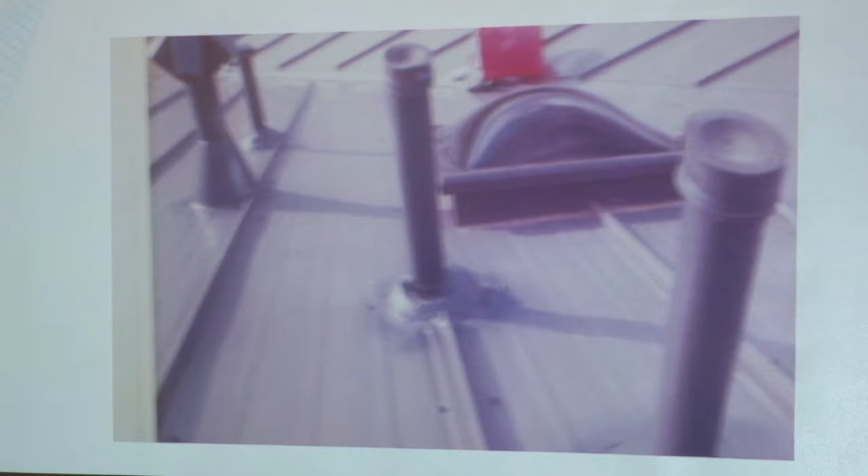You guys deal with a lot of Kiva fireplaces in the Farmington area? No, not too much. Well, if you come across any fireplace or somebody asks you to build one, what we want to do is prevent any type of butchering on the fireplace like they did on the side of this fireplace, and then use the wrong type of gas line into that fireplace.

And if you notice, what they did is they butchered the whole thing, and they said, well, we'll just infill it with some spray foam and call it good. Again, that doesn't work. And what ended up happening on this particular job is they had to take apart that whole side of that fireplace and build it back the way it should have been. And again, it's not good.

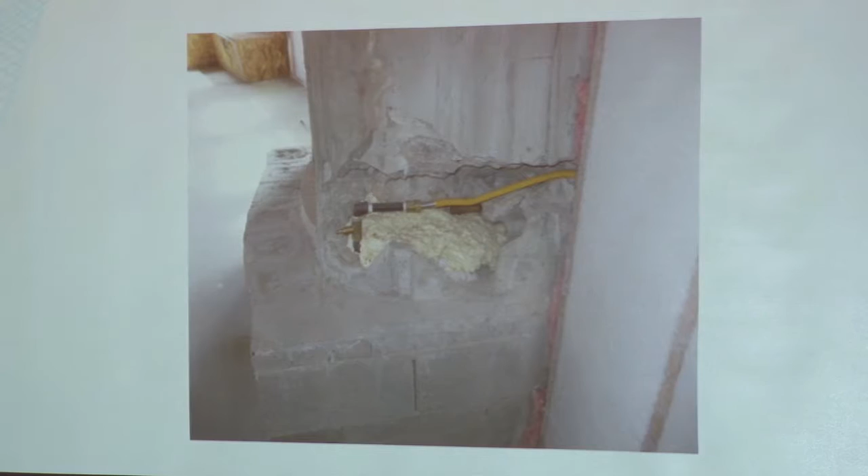On this particular job here, I happened just to be in the area driving by, and I see this addition to a mobile home where they didn't have a permit, and it's something that a general construction inspector would be required to permit in addition to a mobile home. And they have this thing resting on some little 4x4s in the ground. No, I couldn't believe it. I was just in shock when I saw this one.

What's the code violation there? Guys see it? Drywall screws. When you use hangers, you got to use required fasteners that are required by the manufacturer, Simpson Strong-Tie. If they require nails, you got to use nails. You can't use drywall screws on there, because what happens is those drywall screws pop off. Next thing you know, there's nothing holding that hanger in place.

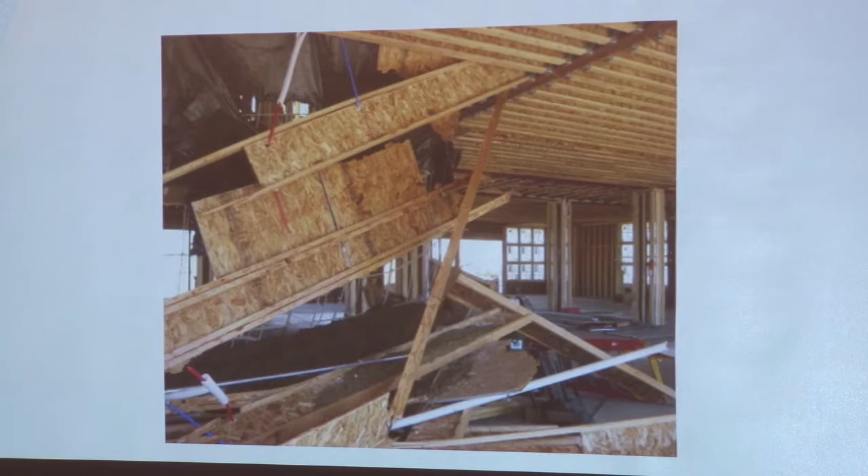So this is kind of the aftermath of what happens when you use hangers that aren't correct. On this particular project right here, they used one hanger that wasn't placed correctly, caused this whole subfloor assembly to collapse when they were doing some lightweight concrete on top. So that's why you always want to make sure you use the required hangers. Don't ever try to modify any of these. Use what's required by the manufacturer. Again, here's a little bit more of the aftermath of what happens when you don't use the required hangers on projects.

So on this particular job right here, we had some framers that came in from Texas, and they started framing this roof structure. And do you guys see what they did on there? What they did is they placed these 2x4s, started notching the top of the TJIs. It's like, why would you do that? Come on, guys. No, that's not acceptable. They said, well, that's the way we do it in Texas, but that's not the way we do it here in New Mexico. You got to do it right.

On this particular job, I actually emailed these to Boise so they could take a look at it, and they were just literally in shock. They were like, God, are you kidding me? I wouldn't even let these guys build a doghouse. That's how bad it was.

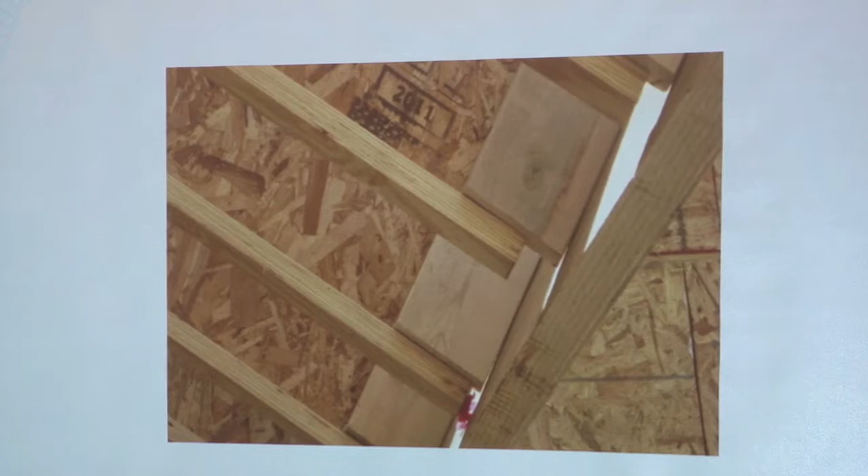If your TJIs are too short, just get some 2x6 blocking and just block it. Again, this is real stuff that we actually see, stuff that happens. Here's another one. TJIs are short. So we'll just get a 2x6 and block it.

So the reason why I showed you a lot of those photographs, I'm not trying to scare anybody or anything, but residential construction is one of our biggest complaints. That's where we see our complaints. So these are the do's and don'ts that I don't want you guys to get in trouble for. So again, roofing is a big issue. If you have questions, always contact your building official.

If you have any questions, contact me. We're there to help you guys. We want to keep you out of trouble. We don't want you guys to get in trouble. Always give us a call if you're unsure, if you have a question about anything. I have one other thing that I want to show real quick, if I could.

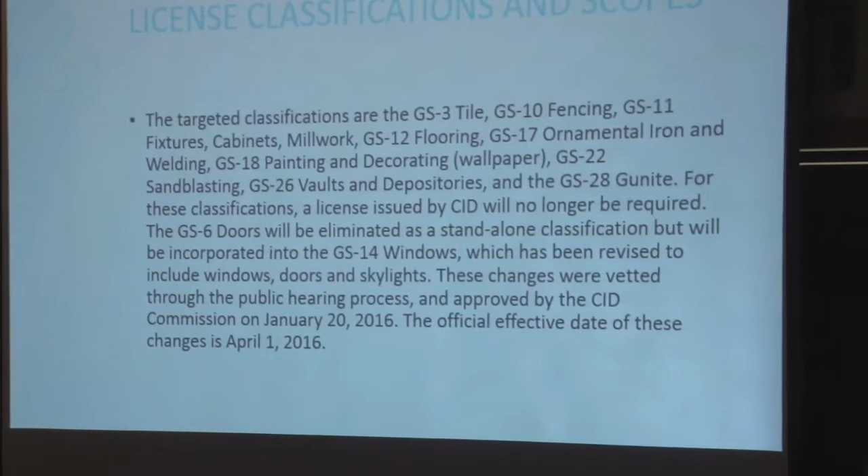So this is just kind of an update, refresher. I don't know if all of you are aware of this, but there are some changes that we made in the license classification and scopes in April of 2016. What we did is we eliminated 9 license classifications. And the reason for that is the way we were looking at it, if you don't permit or you don't inspect, why do you need the license? Say, for example, painting, GS18, why do you have that classification? Again, you don't permit and inspect, so why even have it?

So just to give you an example, these are some of the licenses that we eliminated. We'll start off with the target classifications: GS3 tile, GS10 fencing, GS11 fixtures, cabinets, millwork, GS12 flooring, GS17 ornamental iron welding, GS18 painting and decorating, wallpaper, GS22 sandblasting, GS26 vaults and depositories, and GS28 gunite.

For the classifications, a license issued by the CID will no longer be required. What we did was with the GS6, doors will be eliminated as a standalone classification, but will be incorporated into the GS14 windows, which have been revised to include windows, doors, and skylights. So how many of you knew that we made those changes? You did? Yeah. So these changes are in effect.

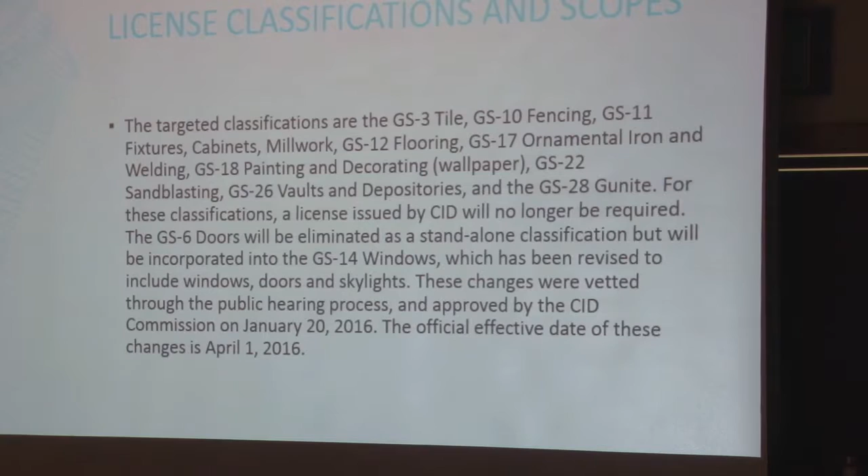So this is the part where you could ask whatever questions you have, anything. It doesn't matter what it is. Or are there any questions that you have of CID that we could answer? I'm sure you've got some questions.

Yes, sir. I didn't understand reglet. Reglets. So a reglet is a metal flashing that's required on the inside of a parapet. Anytime you have any type of new roof assembly, you have to have a reglet on the inside of that parapet. That way, when the owner has to come in and put another roof, they have somewhere to terminate that roofing. So that is something that's in the code, something that is required. You have to have a reglet on the inside of a parapet.

So is that just basically a flashing piece that sticks out that you can tuck back up? Yes, a reglet or an approved flashing would be accepted as a reglet. You've got to work with your building official for whatever area you're in, but reglets are required. Okay? Any other questions? Another? No? I have one.

Okay. And just for you here, in the 2015 residential code, there's a new section for decks. I know you're going to rush down and buy a new IRC so you can find out about it. If you can't do that, go online to American Wood Council. They have some good information. One of the things you need to know is that the joist spans are different for regular lumber. They have a wet service factor that they assign to joists now for decks. Their span tables are different from regular span tables, for suppliers or anybody that's thinking about building a deck. You really need to go to the provisions of that.